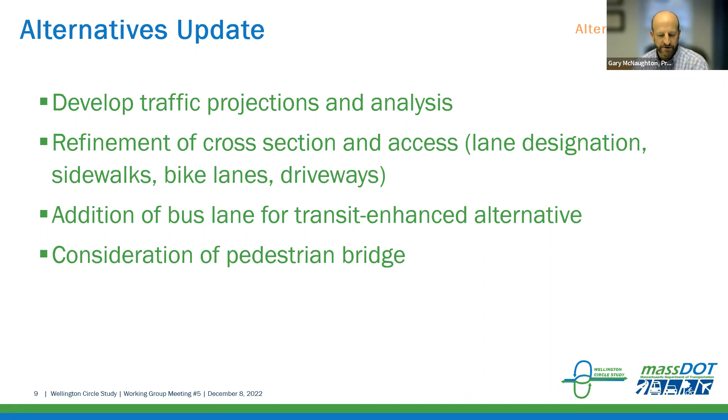There are some impacts to this, and some benefits from it. On the pedestrian and bike front, we have some modest improvements for bicycles, but more appreciable improvements for pedestrians with better connections, shorter connections, and improved paths. You can see some pretty significant increases in open space. The one negative that really came from this was the degradation of the right turn operations—by eliminating those separated right turns, that limited some flexibility on how we can operate the signals.

When we look at this, and you'll see this on all of the alternatives, the cost is at the bottom of the screen, and the costs are all in current day dollars. We haven't gone through the escalation effort—we wanted to keep things as an apples to apples comparison, and the way escalation is occurring right now with inflation was skewing some of those results. So to keep things comparable, we just talk in today's dollars. This series of at-grade improvements for the short term would run roughly $6.2 million.

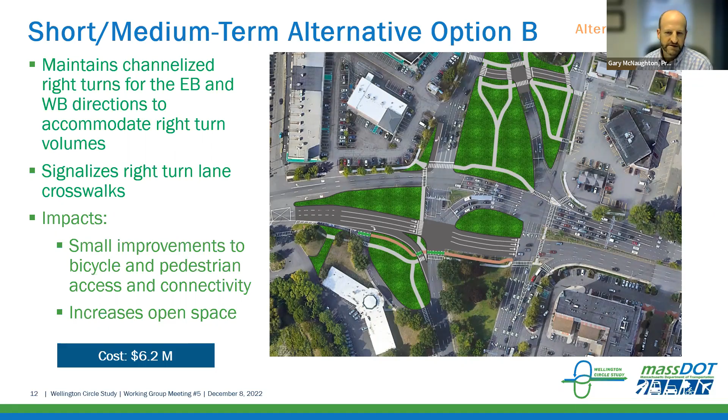So then as we look at the at-grade alternatives—these are concepts we've shown before—when you look at the existing circle, coming into the circle on the parkway in particular, you have 5 and 6 lanes on each approach. Coming northbound on Fellsway, you have 6 lanes on that approach. Similarly southbound, you have a couple of different approaches, all with multiple lanes. Where some of the primary goals for this project were to better accommodate pedestrians and bicycles, when you look at the at-grade alternatives, you'll notice fewer lanes. That has some consequences for vehicle operations that we'll talk about in the alternatives evaluation process.

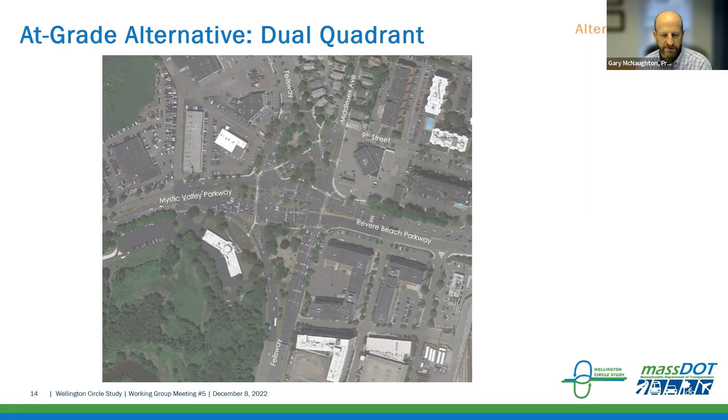So if you go to the next slide, we'll see the square concept. These are named just based on the configuration to the north side of the circle, and again these are ones you've seen. We've made some minor tweaks to lane assignments if you compare them side by side. This one really is prioritizing that Fellsway connection in the north-south direction compared to the triangle one, which we'll show in a moment.

But the key feature of both of the main at-grade alternatives is that quadrant roadway that connects from Fellsway to the south over to Revere Beach Parkway, to really best accommodate that heavy and dominant flow from the east of the project to the south, and south back to the east—really accommodating that heavy flow through that quadrant roadway.

This does change the connections to the north. You see Middlesex has its own separate move, but the connection from Fellsway to go west requires traveling along that connector road over to Middlesex Ave and vice versa. To go from Middlesex Ave to continue on to the Fellsway southbound, you would have to use that connector road to get over to the roadway on the west.

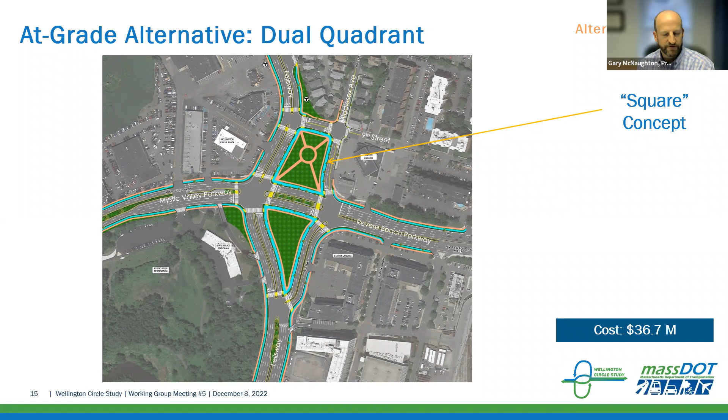The triangle changes that priority. If you go to the next slide, you'll see we have the triangle to the north, but you'll notice the Fellsway is oriented to connect primarily to Revere Beach Parkway.

And if you're going southbound on Fellsway, you would have to take a right to get onto that roadway that connects to Fellsway. This one does a little bit better job for vehicles, I think, and this is the one that we modeled for transit, which I'll show in a moment.

Both of them do a very good job of creating additional open space, providing opportunities for pedestrians and bicycles. As you'll see, all of the separated facilities, the bicycle facilities are shown in blue and the pedestrian facilities in tan. So both of them are comparable on those levels, and we'll talk about that more in the analysis slides.

And this is the transit alternative. So it really is the triangle which we chose as our transit priority alternative, because the transit routes are running up Fellsway, and this one best served that destination. This one does widen out the roadway a little bit more, adding that lane for the transit service. And I apologize, I didn't highlight the costs, although they are on both sides.

The other two were roughly 36 million. And then this one, due to the increased pavement width for the transit alternative, the cost increases slightly to about 38 million overall construction, again in today's dollars. So you'll see this one really is oriented towards accommodating that transit route from Wellington Station up to the Fellsway, off into that direction where the routes are currently running.

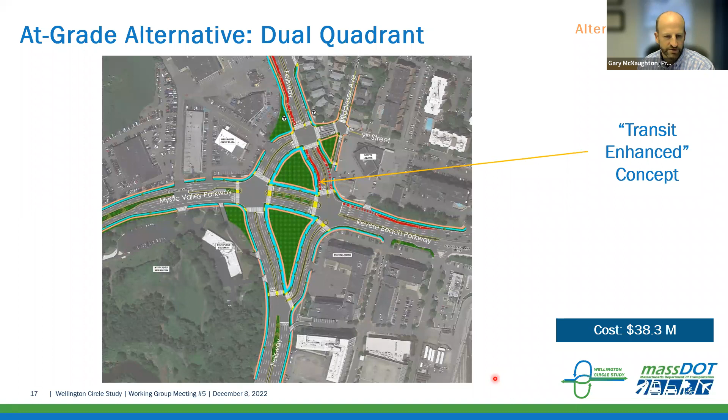So we did hear a lot about the at-grade alternatives and the absence of the crossing on the east side of the circle area on the parkway, and the request for a grade separated crossing there. And we did have this alternative that we had shown before.

We've gone and priced it out. It is a long span, so there's a lot to cross, which contributes to the cost, as well as the ramps that are necessary to get up to the elevated structure, which add quite a bit to the cost. So when you look at the at-grade alternatives that were roughly in the $36 million range, this pedestrian bridge itself is almost equivalent to those, coming in at about 35.7 million. And again, this is on the east side of the project, the primary circle area.

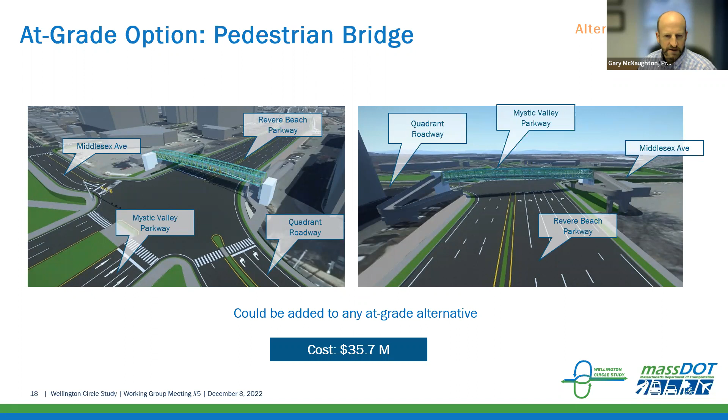And then the other alternative that we advanced into the analysis phase was the grade separated alternative. As we had discussed, the grade separation is for the east-west roadway - that's really the one that was most feasible. But the drawback to that is it's not really directly serving that south to east, east to south movement that's dominant through the circle.

It does provide some benefits for traffic, removing that east-west flow from the surface roadways. But you'll notice the surface roadways are really dictated by the structure and the location of that structure, so you don't have quite as clean and cohesive a surface roadway network as you might otherwise have hoped. And we still really need to serve that movement to and from the east to the south, which is really requiring those double lane roadways coming through and connecting around in that curving pattern to and from those major roadways.

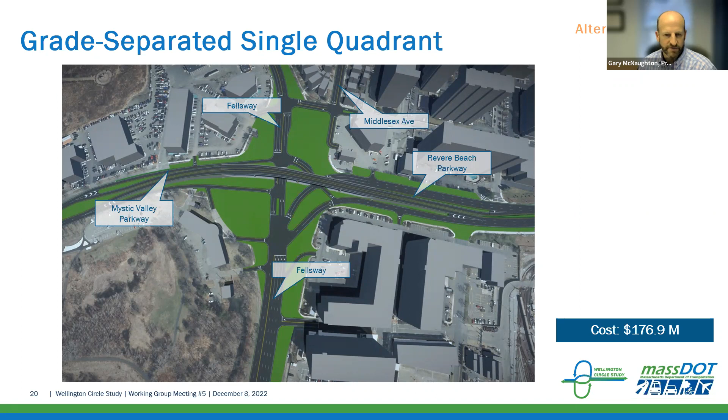The cost of this one is obviously considerably more. And again, these are purely construction dollars, not life cycle costs, which the ongoing maintenance of the structure would further increase. This one comes in at almost $177 million for construction, as you've seen on the roadway on the screen here.

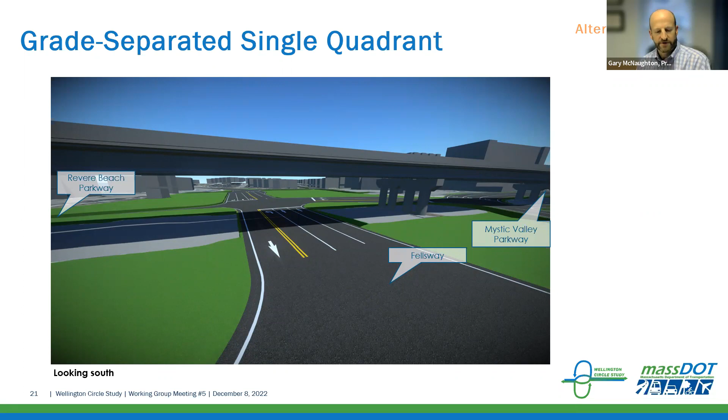So when we talk about the alternatives evaluation, I'll be turning over to others to present this in a moment, but we really started with the 4 primary study goals, and those are informed by a series of different criteria and objectives that we have. Those are the different evaluations that you'll see. On a rating scale, we tried to keep it fairly simple without getting into a lot of nuanced debate over whether this should be on a scale of 1 to 10.

Is it a 2? Is it a 3? Or even 1 to 5? You end up using 2.5 and things like that. So we keep it very simple: is this particular area benefited, is it neutral, or is it impacted by the different alternatives? So you'll see that evaluation criteria used throughout.

And with that, I'm going to turn it over to Jordan to start talking about some of the safety elements of the evaluation. Thanks, Gary. Jorden van Emmerik, part of the project team.

I'll briefly discuss how the various alternatives stack up regarding roadway safety. Way back in the study process, when we were going through existing conditions, we outlined how the complex geometry, the sheer number of travel lanes, and the high vehicle speeds have made Wellington Circle a high crash location, with a particularly high number of sideswipe and angle collisions. We'll keep that in mind as we go through the next couple of slides.

In the previous working group meeting, we outlined several design elements that aim to improve multimodal and vehicular safety. These include wider pedestrian facilities, protected crossings, protected bike lanes, and accessible bus stops, among many others. We anticipate all of the long-term alternatives to include numerous safety elements, whereas the short-term and mid-term alternatives that Gary outlined would include some, but not all, of the safety design elements.

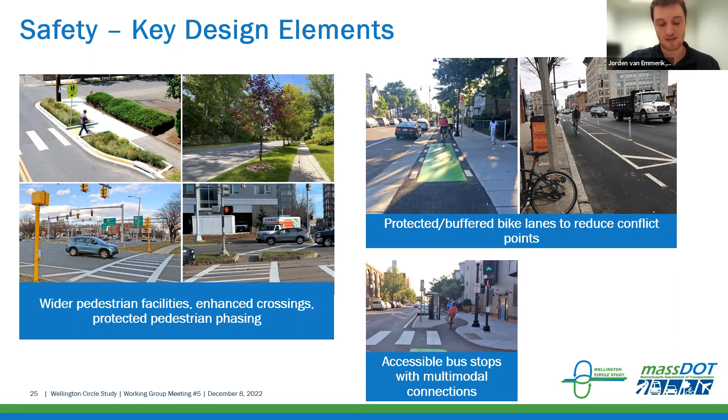As I said, we anticipate the long-term alternatives include numerous design elements that aim to improve safety. This slide outlines some of the biggest changes. All of the long-term alternatives will include fewer approach lanes for each approach at Wellington Circle, along with elimination of certain vehicular movements that would reduce the number of conflict points between vehicles, pedestrians, and bicyclists, along with a more simplified geometry compared to the existing condition.

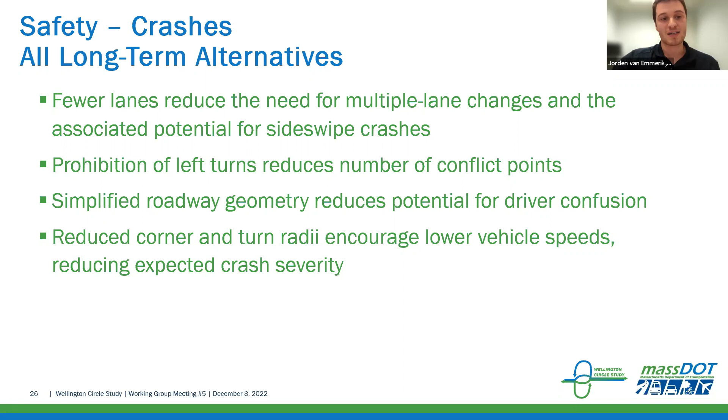Regarding pedestrian and bicycle safety, currently there are no bicycle accommodations at Wellington Circle, though signalized pedestrian crossings exist. For the long-term alternatives, we anticipate all of them will include fully separated bicycle facilities, as well as more enhanced pedestrian facilities. Some of the alternatives will also include additional signalized crossing locations to better line up with pedestrian desire lines.

The at-grade alternatives that Gary outlined will, through lane reductions and the elimination of slip lanes, reduce the highway-like feel of Wellington Circle, whereas the grade-separated alternative will not eliminate this highway-like feel of the study area.

In summary, we expect all of the build alternatives to reduce the number of angle and sideswipe crashes through simplification of the roadway geometry, elimination of approach lanes, and inclusion of the safety design elements I outlined earlier. As I said previously, the short-term and medium-term alternatives will include some, but not all, of the changes we see in the long-term alternatives, so the safety benefit is a little bit less for those alternatives.

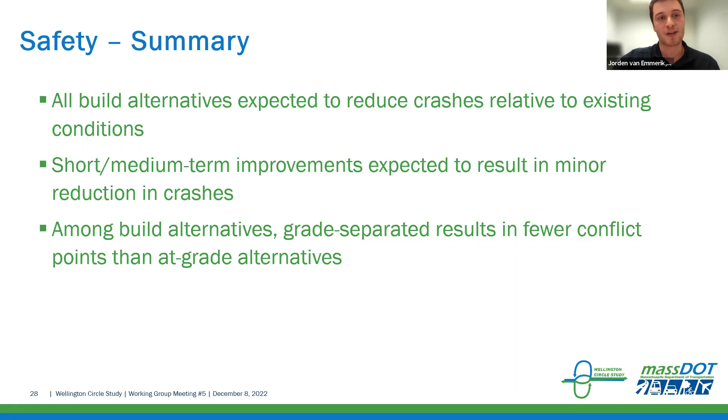Finally, while the grade-separated alternative will remove eastbound and westbound traffic from the circle via the overpass, we anticipate the introduction of the overpass and associated ramps would potentially increase travel speeds along the area roadways, along with maintaining that existing highway-like feel of the circle. Emil Gruber will go into more detail on that later in the presentation. With that, I'll hand things off to Maureen, who will talk about mobility and local connectivity.

Thanks, Jordan. Maureen Chlebek, I'm the traffic engineer on the McMahon team. Let's talk about how the traffic operates. As you'll see on the next slide, we kind of spill all the results right at the beginning. This is your big picture takeaway of what gets better and what gets worse on a mode-by-mode basis for each of the alternatives described in this presentation. Ideally, we'd love to see one row with all green check marks, but in this case, on this project, we're not seeing that. What that really means is that there's a balancing act here.

When we get into our long-term at-grade solutions, they do help the pedestrians and cyclists, but they do knock down the vehicle operations a bit. And then our grade separated helps the vehicle operations, but actually degrades the pedestrian operations. So we'll dig into this a little deeper as we go through these slides.

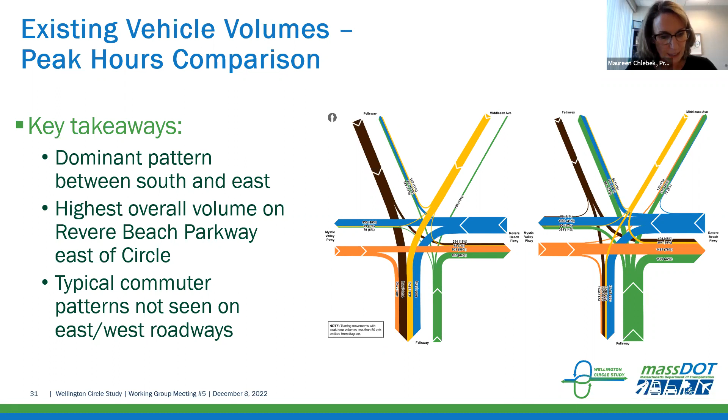On the next slide, what you'll see is a comparison of the amount of traffic that travels through Wellington Circle compared to other high volume intersections in this area. I'm sure you'll recognize some of these: Sullivan Square, Santilli Circle, Sweetser Circle. By far, Wellington is carrying a lot more traffic than all of these high volume intersections. So just keep this in mind as we go through the results.

What's happened over time is that the existing circle has been tweaked and changed, and capacity has been added. It's become this big snarl of traffic, but it actually does process a high volume of traffic as it is. However, it does so with a high crash rate and with low amenities for other modes of traffic.

As we developed alternatives that would simplify the geometry, make it easier to get through the circle, and enhance pedestrian and bicycle experience, in doing that we were really forced at times to reduce the vehicle capacity. So we're going to demonstrate this for each alternative in terms of level of service. But I want to explain how we use level of service in this project, because again, our goal was to improve safety and make the area multimodal.

It was not to make it so a motorist could travel through this area faster than they can today. So while we use level of service, we really used it as a mechanism to understand how much traffic's getting processed. Can we manage the queues between intersections? And do we have movements that are over capacity?

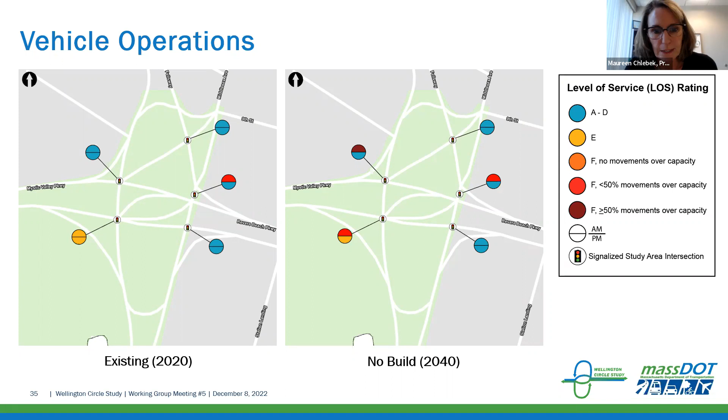As we move on to the next slide, you'll see we'll compare 2040 no build to the at-grade square alternative. And while we are still seeing areas with long delays and poor levels of service, I think the big takeaway when you look at these 2 graphics is the street network is much simplified under the square alternative. It's much easier to understand. It's also been spoken about before that the at-grade alternatives are safer and better for peds and bikes.

On the next slide, we'll do the same comparison, but with the at-grade triangle with transit enhancements. And again, we're seeing some locations that are problematic in terms of operations.

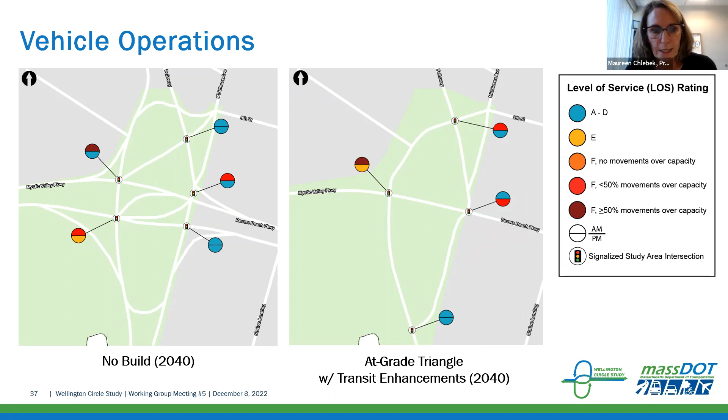Next, we'll look at no build compared to the grade separated. And this is the one scenario where we begin to see improvements for vehicle operations. And again, that takes you back to the first slide I spoke to, where that is the one scenario where we can make it better for the motorist, but we make it worse for the peds and bikes.

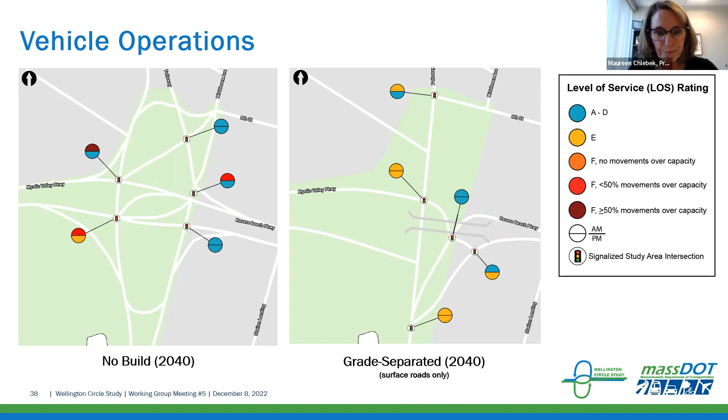On the next slide, you'll see a summary. As we've explained, the short-term alternatives reduce the capacity for some of the movements. We spoke about option A, with removing the channelized right turns being a bit of a problem in terms of right turn operations.

The long-term at-grade alternatives, overall, all reduce vehicle capacity. When we get to the grade separated alternative, we see an increase in capacity, but note that's for eastbound, westbound traffic. As we noted before, the heaviest movement through the circle is really south to east flow.

So I'm going to turn it over to Emil at this point to run you through the pedestrian and bicycle operations. Thanks, Maureen. My name is Emil Gruber. I'm working with McMahon here with the project team, working along with Jordan and Maureen on the traffic analysis. I'm going to talk through the other modes besides vehicles, starting with pedestrians.

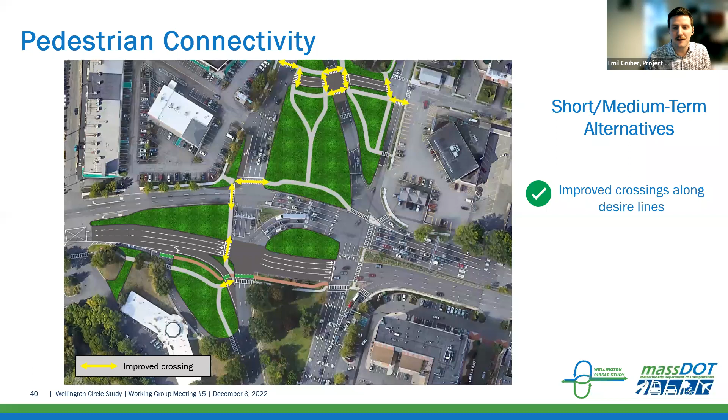One of the metrics we looked at when comparing these alternatives for pedestrians is connectivity. This is the short-term alternative B. What we've highlighted with these yellow arrows are crossings that have been improved, whether they're shorter, signalized, or brand new crossings where you can't currently cross Wellington Circle. As you can see, we get a good number of them, especially up on the northern side with the short-term alternative. Flipping to the next slide for some of the build alternatives.

First off, the square: you can see lots of new and improved crossings. However, we are missing that one crosswalk on the far east of the circle, which currently exists. That was the area where we identified a pedestrian bridge could potentially go.

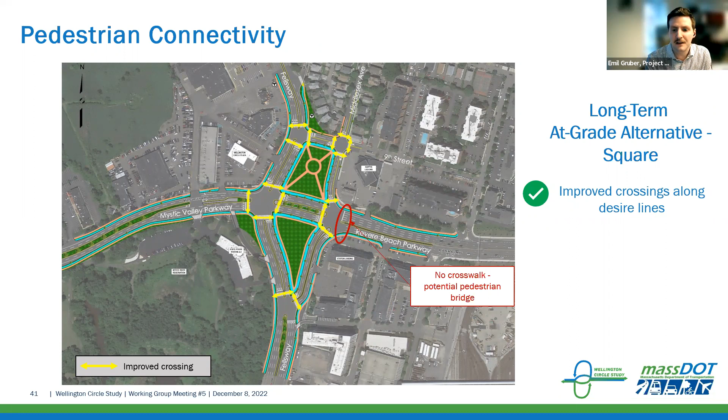If we go to the next slide, we can see the triangle. Very similar to the square, generally improved, but still lacking that eastern crosswalk.

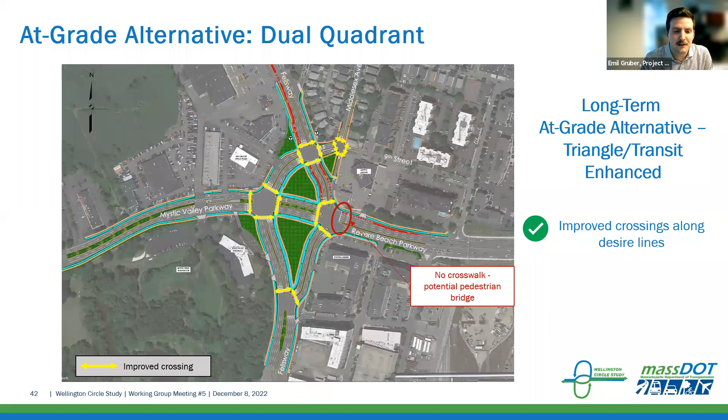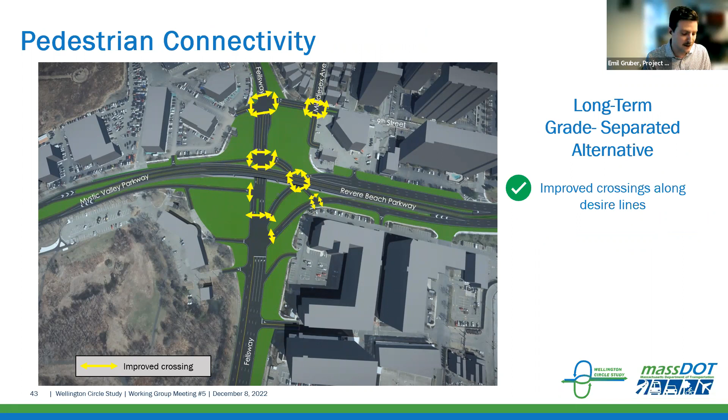Finally, looking at the grade separated alternative, I think this one stands out among the other ones because it tends to have shortened crossings, but also more crossings for people walking through the circle. Obviously a lot of those crossings are happening underneath a highway overpass, so that changes the nature of it as well.

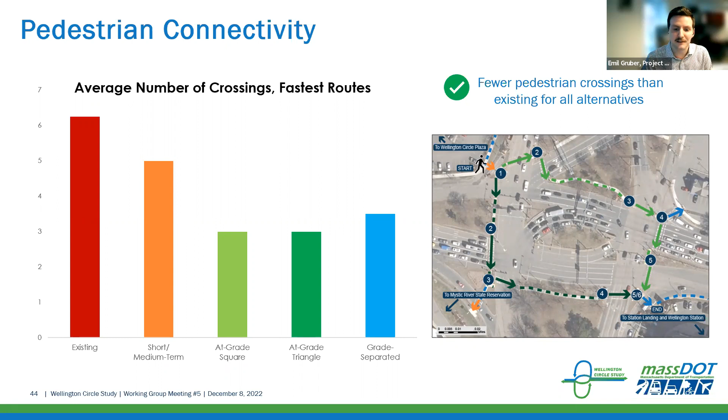Moving on from connectivity, but staying with the same corner to corner route, we presented the average time it would take to cross, which if you remember was about 5 minutes for the existing condition. With the short-term improvements in place, you save about a minute, similar to the long-term grade separated. The long-term grade separated actually has more waiting time than the short-term, but is a little bit faster because you're able to walk more directly. The long-term at-grades are one area where they really differentiate themselves, saving about a minute and a half over the 5 minute existing crossing time.

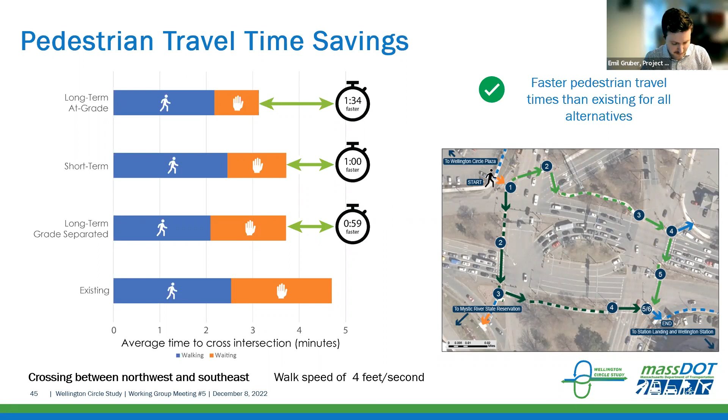Moving on from pedestrians, one more point: talking big picture about the pedestrian experience. One metric we tried to use to capture that is the number of crossings of more than 3 lanes where there isn't a refuge island. For the entire circle intersection system, under the existing condition, there are 8 of those.

Under our long-term alternatives, the transit enhancement does add some longer crossings compared to the at-grade option. In general, all of the alternatives provide more of these short and safer crossings than the existing condition does.

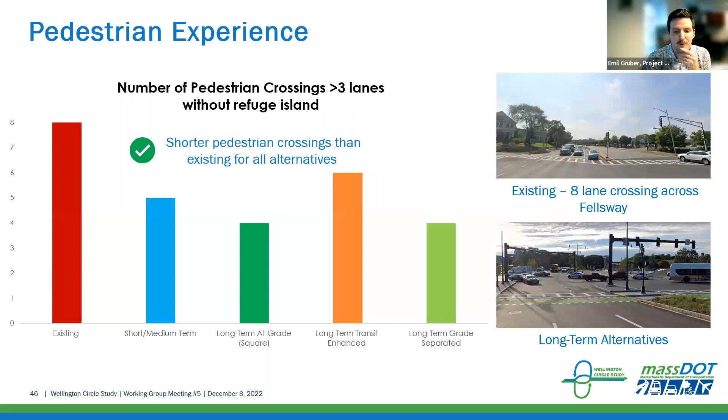Stepping back to what Jordan was saying, think about what's out there on Wellington Circle right now: very wide approaches in terms of travel lanes, lots of large highway-style wayfinding signage, very much vehicle scaled. One of the things we think we can benefit at Wellington with basically all of our alternatives is improving that pedestrian scale a little bit and bringing things down to create less of a highway environment, with the obvious exception of the long-term grade separated option. It's hard to get away from the highway feel when you have an overpass over the top of it, so that's definitely a major differentiator between the grade separated and the other alternatives we're looking at.

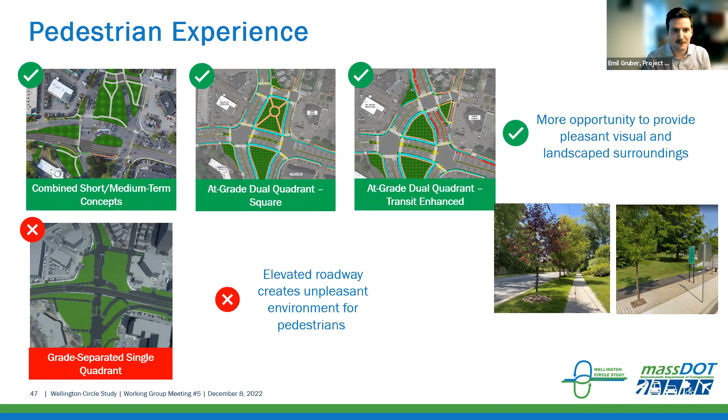Now moving on from pedestrians to bicycles. If you remember, we presented this a while ago: looking at the bicycle network in Wellington and the broader region, there's a big gap in the middle of it, and that's basically where Wellington Circle is. With the short-term and medium-term alternative, we have that little eastbound separated bike lane we're able to add in, so that's a marginal improvement for that specific connection. But when we go to the long-term alternatives, this is really where basically all of the long-term alternatives show a major benefit for bicyclists.

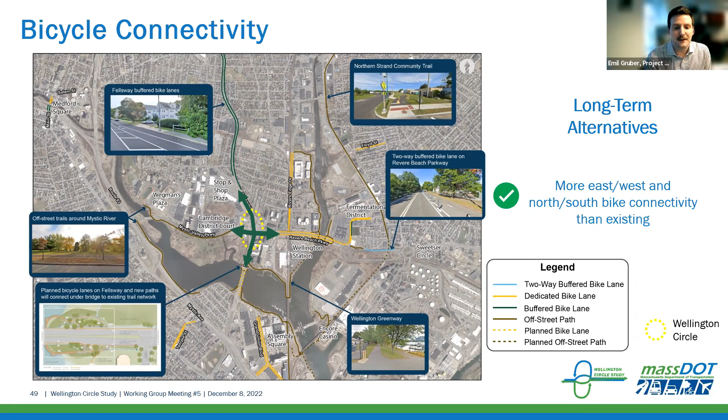We're able to provide with any of these long-term alternatives, more or less, separated bicycle lanes with signalized crossings throughout the circle, potentially connecting that gap that Wellington Circle currently forms in the regional network. Our next slide tries to quantify this concept.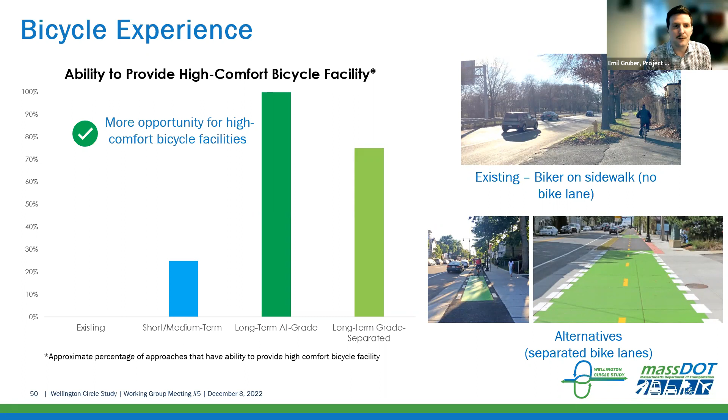Looking at the long-term options, this is where we're able to really provide quite a lot. For our long-term at-grade options, we believe we could provide high-quality bicycle facilities basically throughout the entire concept and on all the approaches. The grade separated concept takes a bit of a hit here, because on the east side of the circle, where you have that bridge plus the needed travel lanes for the surface roadways, there really isn't space for the separated lanes over there. So that's an overview of the bicycle connections.

Now we are moving on to transit. As Maureen discussed, most of these long-term options that we've looked at do have some decrease in vehicle capacity, and that also affects the bus routes going through Wellington Circle. Obviously, improving the bicycle and pedestrian connections through the circle does improve connections to Wellington Station. So in that sense, transit does benefit from all the long-term alternatives, but for this we're really focusing on those three bus routes that come through Wellington Circle from the north over to the east and vice versa.

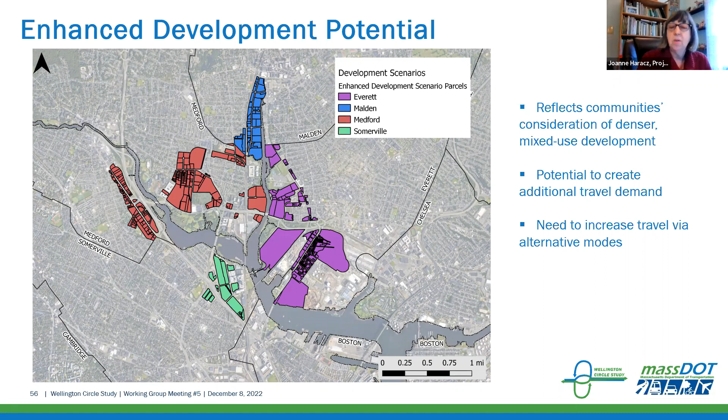Regarding active transportation facilities and connectivity, if you remember what Emil was discussing with bicycle improvements for connectivity, and pedestrian improvements for connectivity and safety, each alternative has some level of benefit for both of those active transportation modes. And same with safety, as Jordan discussed earlier, there are expected improvements to safety for all modes with each alternative.

And then we looked at community cohesion, which looks at the barriers or lack of barriers between different neighborhoods surrounding Wellington Circle. You'll see for the short-term alternative and then the at-grade long-term alternatives, those are expected to reduce barriers for people between neighborhoods because of that improved connectivity for all modes from one end of the circle to the other.

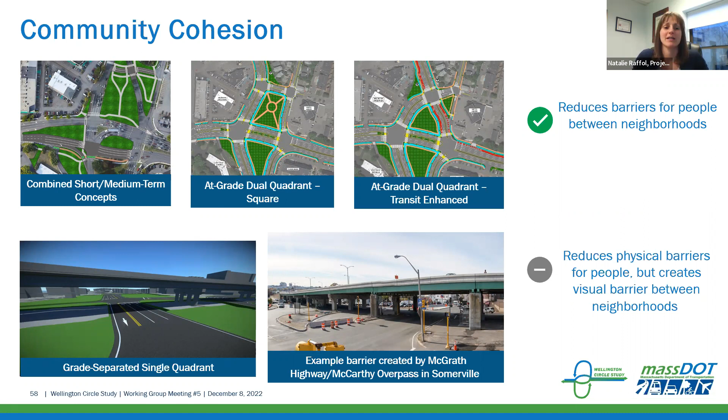So with that, I'm going to turn it back to Gary to summarize our analysis.

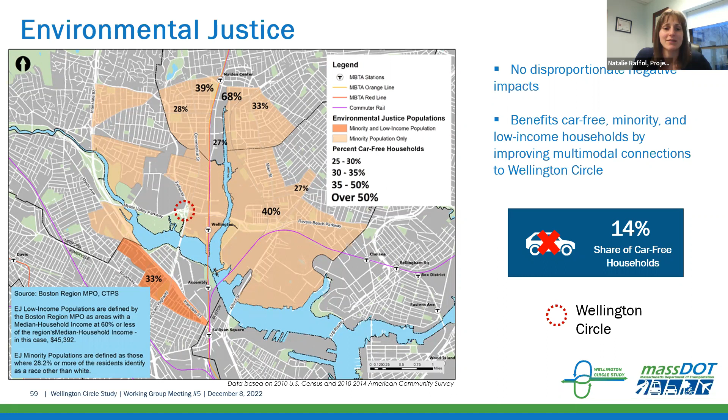But as we've noted, we removed a good number of lanes, and those were primarily to make this a better, more livable area for pedestrians, for bicyclists. And that's where we're seeing a lot of those green check marks. We're creating additional open space, additional opportunities for healthy transportation, and really just the overall cohesion of the area.

I know when we look at land use and economic development, we're opening up opportunities for space. As those developments occur, there is really going to be an impetus to make sure that those are multimodal. The traditional approach of increasing vehicles and adding more vehicles to the streets really isn't something that the network can absorb, whether you're looking at the Wellington Circle area or even beyond as you go further south on Fellsway or along the Parkway. You're going to encounter other areas where the capacity isn't there.

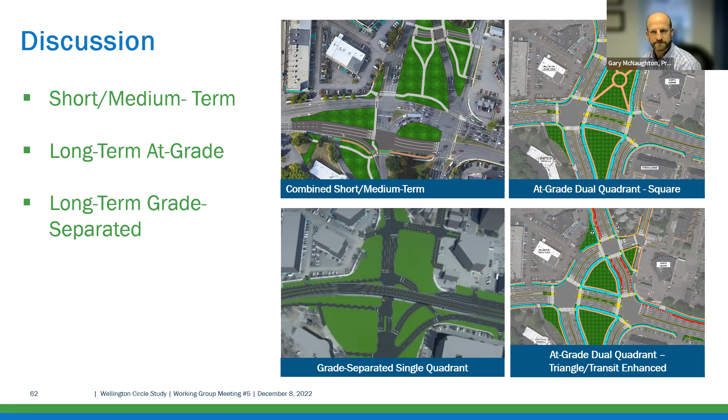Thanks, Michaela. It's nice to see everybody. I think the last time we saw one another was prior to the orange line shutdown.

So I want to use that as a little bit of a framing for a couple of comments, if that's okay. Folks, back in August and September, this region came together, MBTA, DOT, the DCR, municipalities, local residents, abutters, grassroots activists. We all came together to say that it was unacceptable for our transit community to not be able to get where they needed to go on time because they were using emergency shuttle buses that were going to be hung up in some of the worst traffic in the northeast part of this country.

And credit to all of you who've got your fingerprints on the emergency bus lanes that we collectively installed in places like Wellington Circle this summer and fall. We learned so much during that period.

One of the things that we learned during that period is that road diets and reallocation of right-of-way from general purpose automobile travel to low carbon modes of travel does not automatically equal unacceptable levels of motor vehicle queues and motor vehicle delay. We got through that period safely and appropriately. Let's build on that momentum.

I point this out because at previous working group meetings, this working group has asked the project team to investigate dedicated bus lanes as part of the future Wellington Circle alternatives. You folks have responded. Thank you. Credit where credit's due. Really appreciate the alternative that shows us some dedicated bus facilities.

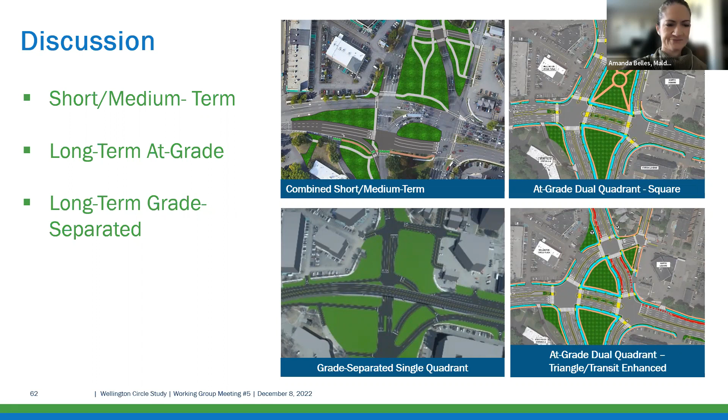Thank you. Great point. Thank you, Amanda. I don't see any additional raised hands from the working group at this time.